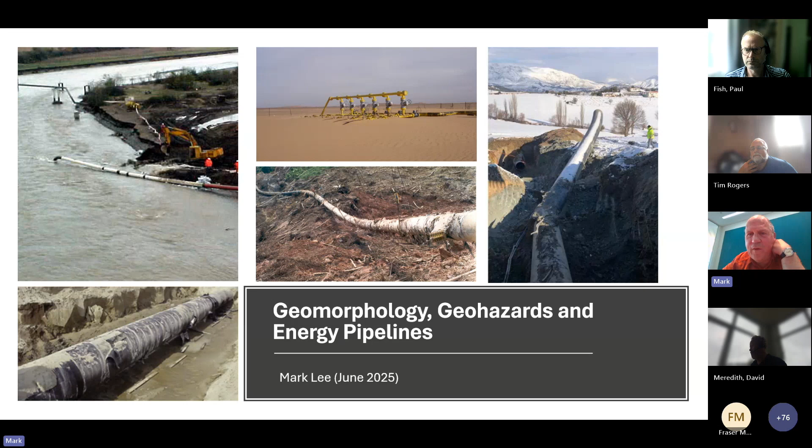Geomorphology, well, I think I'm going to take a pretty Catholic view of what geomorphology is, but essentially it's going to be about surface processes and near-surface ground materials.

So this block of trees, can you see the cursor, Paul? Cursor works, maybe? Yeah, yeah.

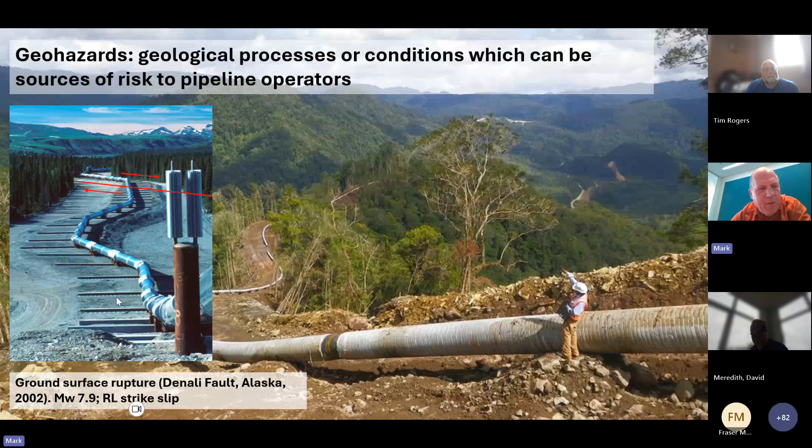So this side is going to be shifting to your right, and this side is going to be shifting to your left. The pipeline is unusual in this context because it's above ground, and it's above ground because of the permafrost conditions. You see the pipeline has been installed on effectively rails, and we'll see why in a second.

This is the impact of the 2002 magnitude 7.9 earthquake. What it led to was these two straight sections of pipe bowing in compression due to shortening across the fault zone. You can also see how the pipeline has been dragged along the railings.

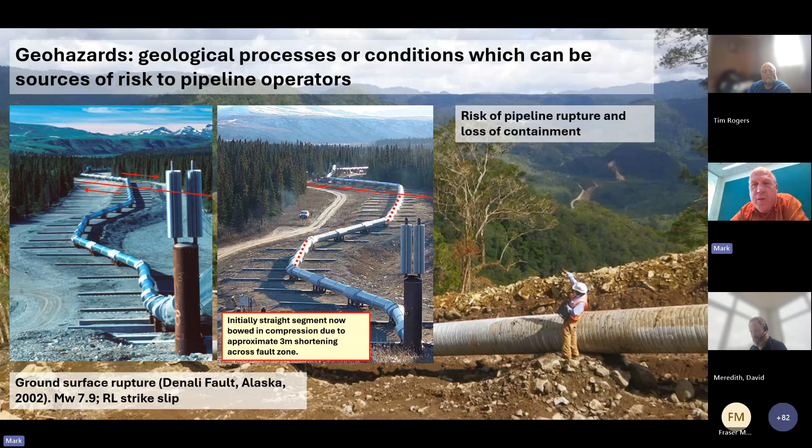So the risk here is obviously pipeline rupture and loss of containment of the product within the pipeline.

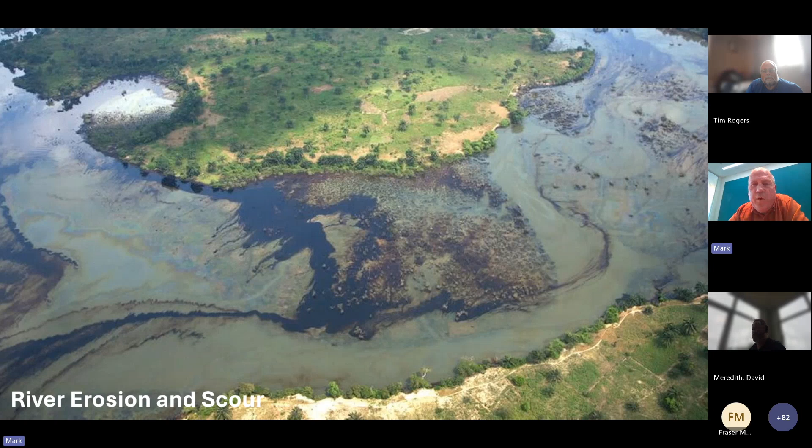So for gently flowing streams, you might have an allowable non-rupture span at 40 to 50 meters, but by the time we've got down to more extreme flow velocities, then spans of 10 meters are critical for pipeline rupture.

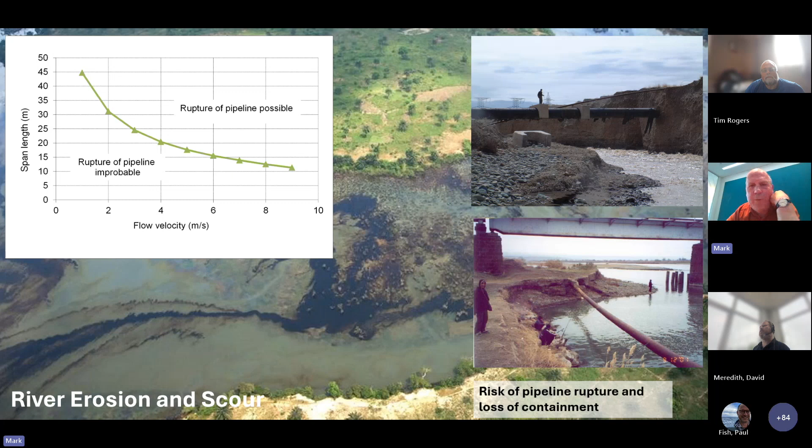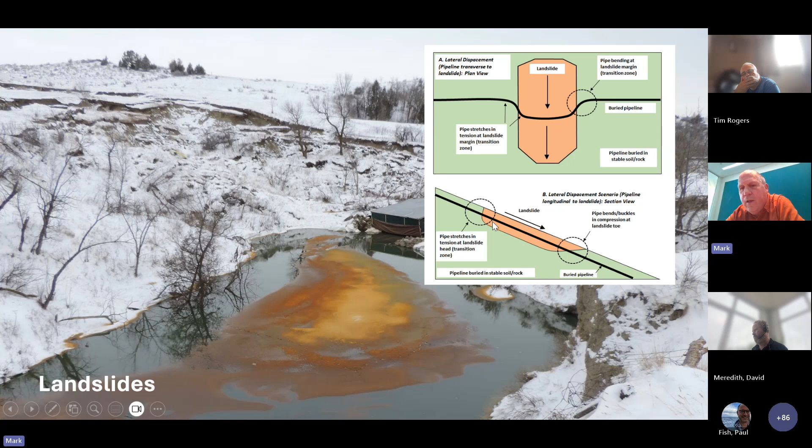So this one is for a pipeline crossing a landslide, and this one would be the pipeline running down through the landslide. And here we get the complicated situation of tension at the head of the landslide and compression at the toe.

One of the key issues is how much displacement can be tolerated, related to the width of the transition zone between moving ground and stable ground. In situations where it's very abrupt, like between bedrock and displaced soil, we can get quite severe conditions. Where the transition zone is wider, it can be more accommodating to the strains.

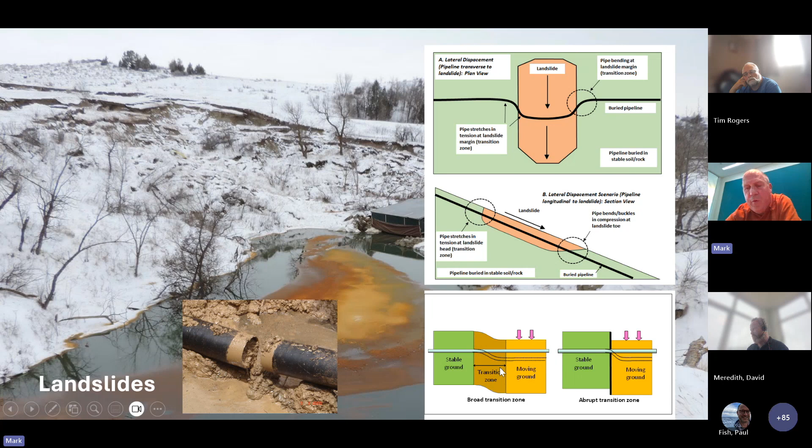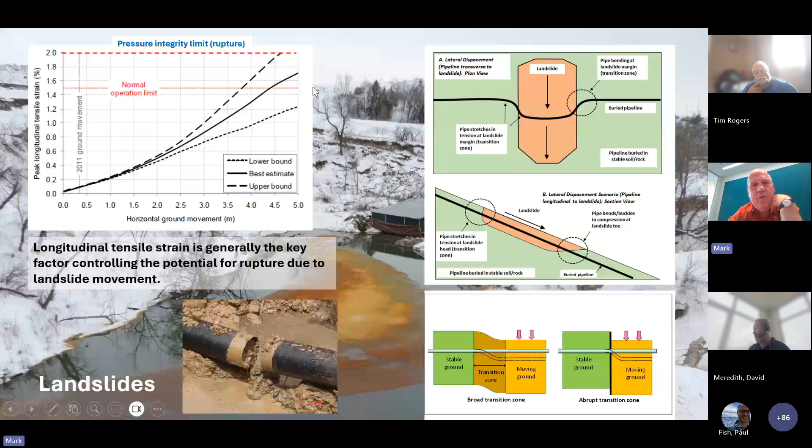The pressure integrity limit is where rupture occurs. The normal operation limit might be where it's safe to operate and you can still run monitoring devices down the pipeline. The pressure integrity limit is where you can expect rupture to occur. And we're looking in terms of, for this large diameter pipeline that has been modeled here, something in the order of 5+ meters of displacement.

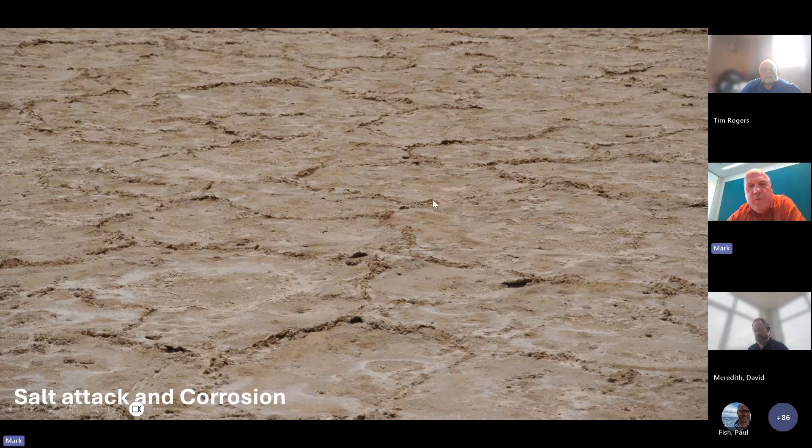Other situations, here we are out in the desert this time. This is an inland sabkha, a salina, and you can see all the wonderful polygonal salt heave patterns across the ground surface.

Pipelines buried within this sort of environment - the groundwater is at or very close to the ground surface, and it's the interactions between the chlorides and ferrous ions within the brine with the dissolved oxygen, which leads to effectively rusting, corrosion and pitting of the pipeline.

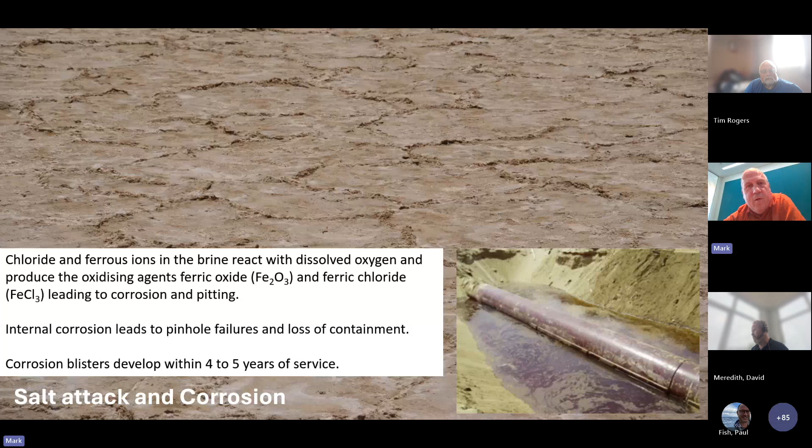Corrosion blisters can develop within 4 to 5 years of service in this sort of environment, and it's a major driver of risk in this type of environment.

One of the things that geomorphology can add to this is the understanding between the position within the landscape, the position relative to the groundwater table, or the limit of the capillary rise above the groundwater table, and the surrounding desert terrain. So the main hazard to buried pipelines would be within saline plains or sabkha salina sort of environments.

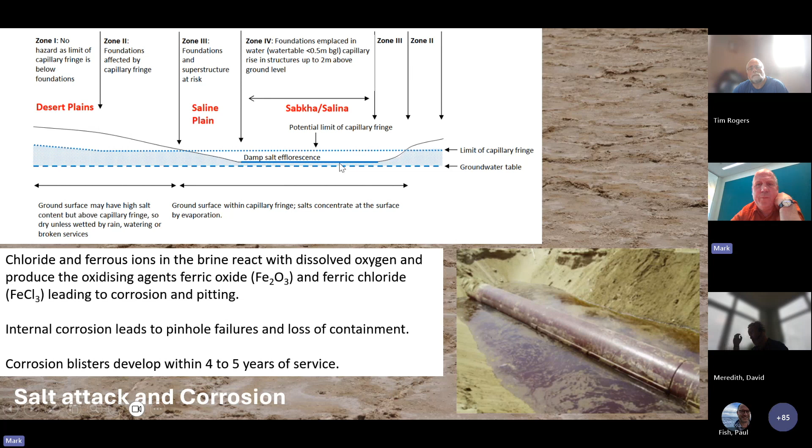Geohazards can also be geological conditions that are sources of risk. Here's an example from Algeria, where the risk is related not to pipeline rupture but to the impact on project cost and schedule. These workers were building a welded water pipeline through the desert, gravity driven, so it needed to maintain a particular elevation. They came across a buried silcrete ferricrete crust, and tens of rock breaking machines were required to make progress, which hadn't been anticipated. They virtually had to scour all the available machines in that part of Algeria to make progress.

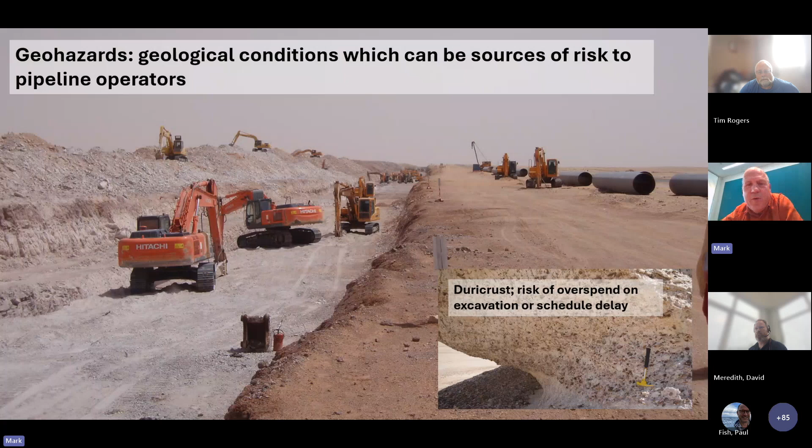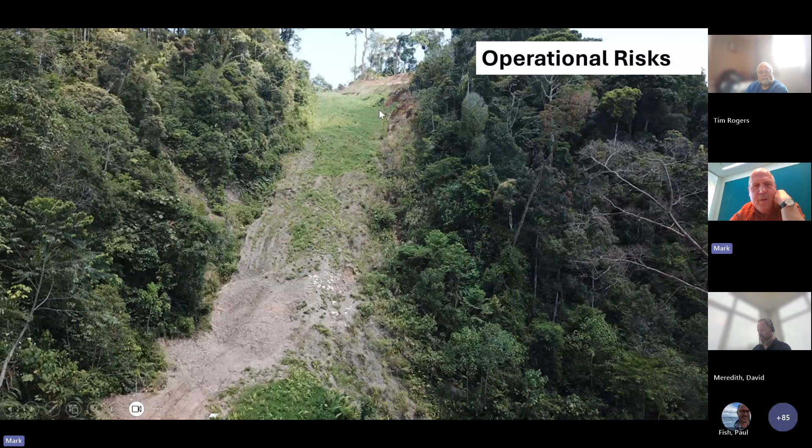Here's a pipeline running through the jungle in Southeast Asia, a typical situation. The pipeline runs down the center of what's called the right-of-way, cleared out of the jungle and revegetating. Then an incident occurs: the gully head fails, the pipeline ruptures, and we have an explosion. You can see the extent of the damage around the landslide area.

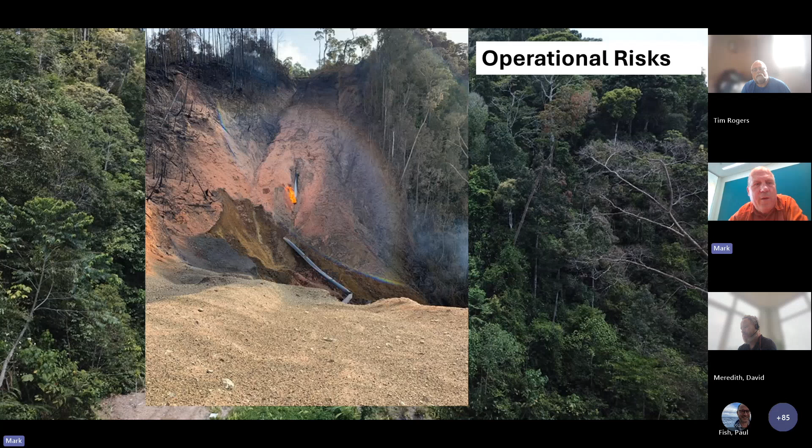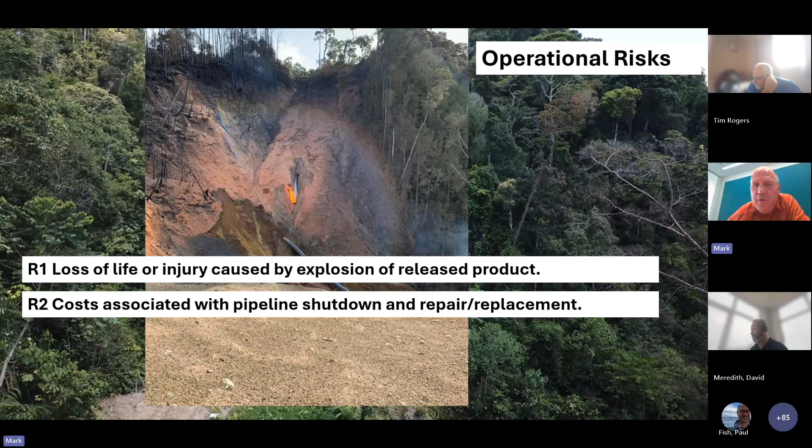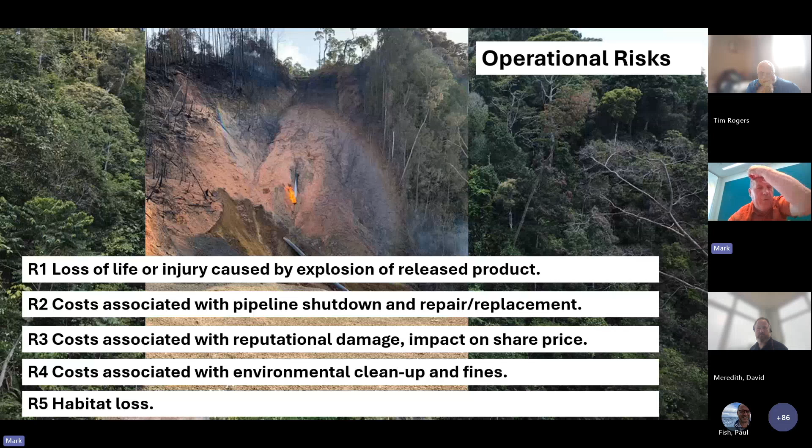The operational risks to the pipeline for the client and operator include loss of life or injury caused by the explosion, though fortunately no one was there at the time. There are costs associated with the pipeline shutdown and repair or replacement, costs from reputational damage and the impact on share price, costs for environmental cleanup and fines imposed by host governments, and of course habitat loss as well.

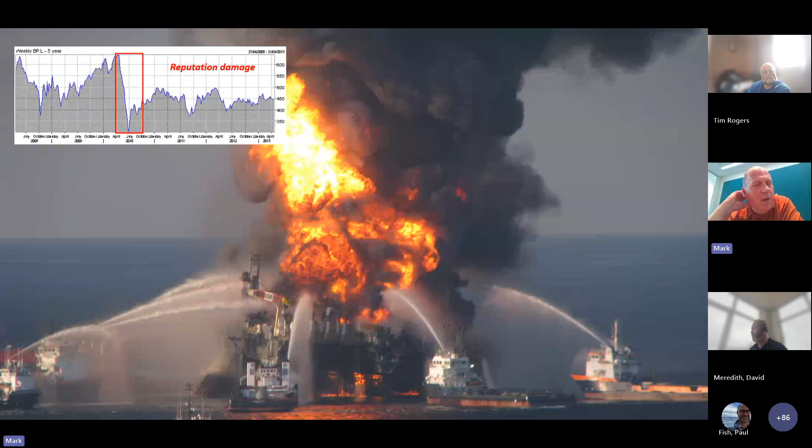So there are bigger risks involved. This is Deepwater Horizon back in 2010, and the chart on the left shows the impact this event had on BP's share price. The share price tumbled dramatically overnight after this, almost to the extent where BP would be taken over by other organizations. So reputational damage is a major driver in understanding and managing risk on pipelines.

So what's the role of geomorphology in all of this? Geomorphology is relevant at all stages of the risk assessment process, and you need to think of its contributions as supporting a global understanding of risk rather than being done in isolation: identifying risks, analyzing risks, providing advice to identify suitable risk treatment measures, monitoring and reviewing, and communicating and consulting as well.

Geomorphology is relevant at all stages of the pipeline process, from planning and design, through construction, all the way to operations. Operations typically span 25 to 50 years, so this requires a long-term commitment to understanding these things.

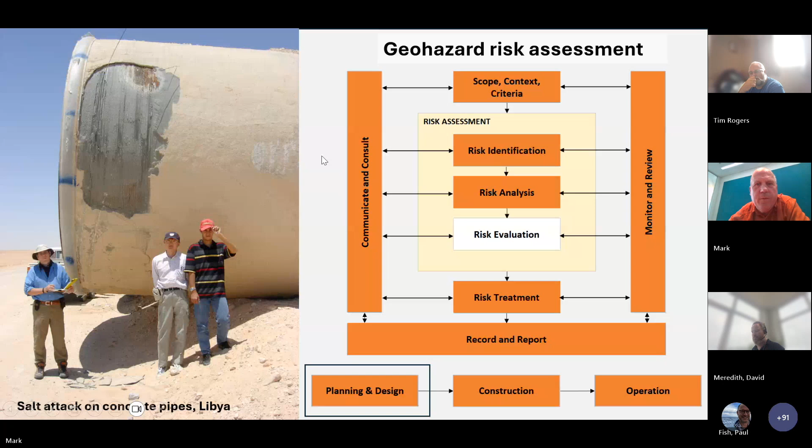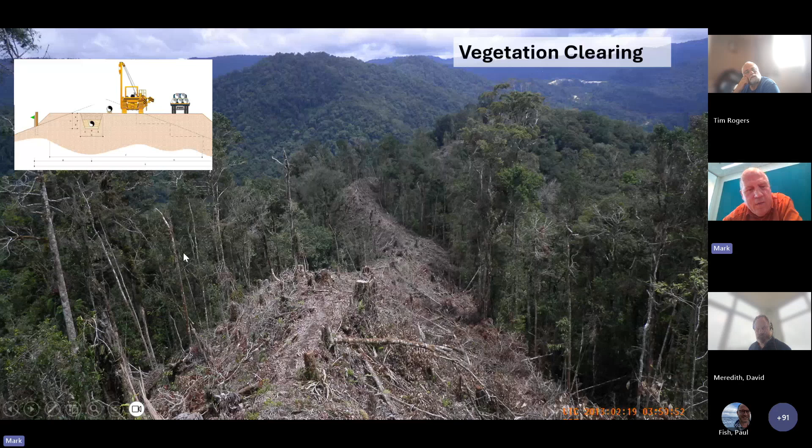First, I'll give a quick introduction to what's actually involved in building a pipeline through remote regions. Here we're back in Papua New Guinea, showing the initial vegetation clearance of the proposed route. We're cutting this ridge crest down to effectively form a 3 to 4 lane working platform where all operations can be carried out. So laying a pipeline isn't just laying it like a hose pipe across the ground surface—there's a lot more to it than that.

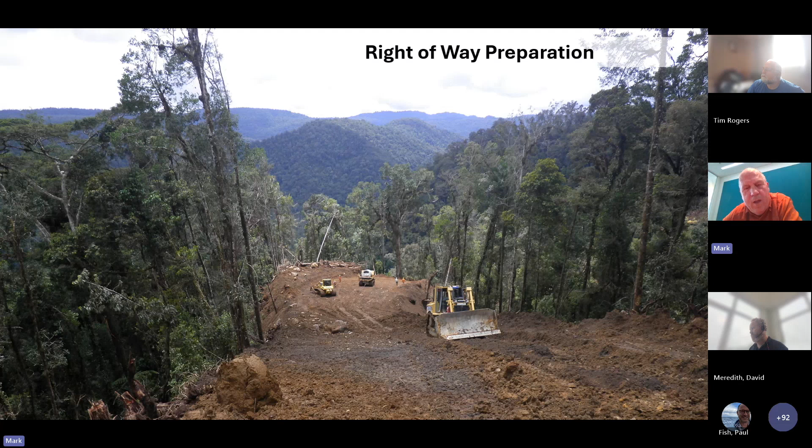Same location, partway through the right-of-way preparation. You can see the bulldozers and the spoil disposal trucks.

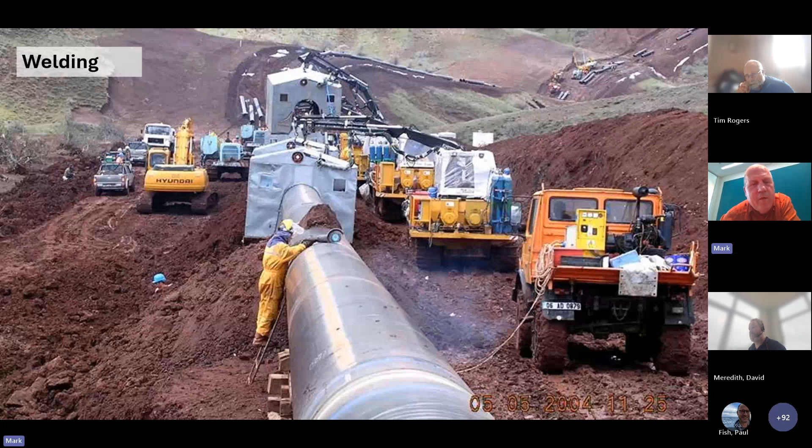Next comes welding, where individual sections of pipe are welded together. In this photo you can see why we need 3 to 4 lanes of right-of-way width: welding gear on one side, other pipeline-related equipment on the other, and a general lane for people traveling up and down the pipeline to do other jobs. If it wasn't so wide, you can imagine the holdups that would occur during the process.

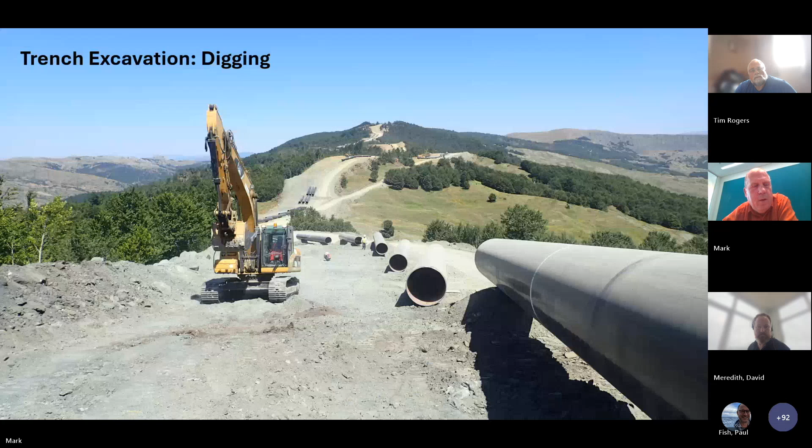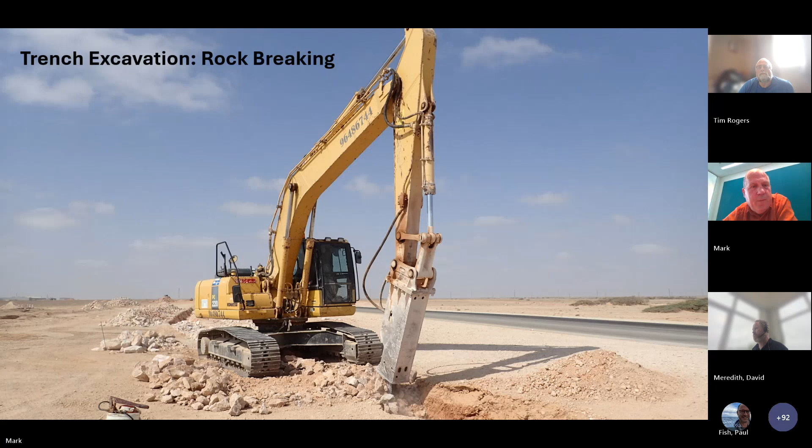Trench excavation—digging the trench into which the pipeline will ultimately be placed—is typically done with a large excavator. In some situations, like desert environments, the calcrete crust may be so strong and massive that rock breaking is required with hydraulic hammers, and in some locations blasting is necessary as well.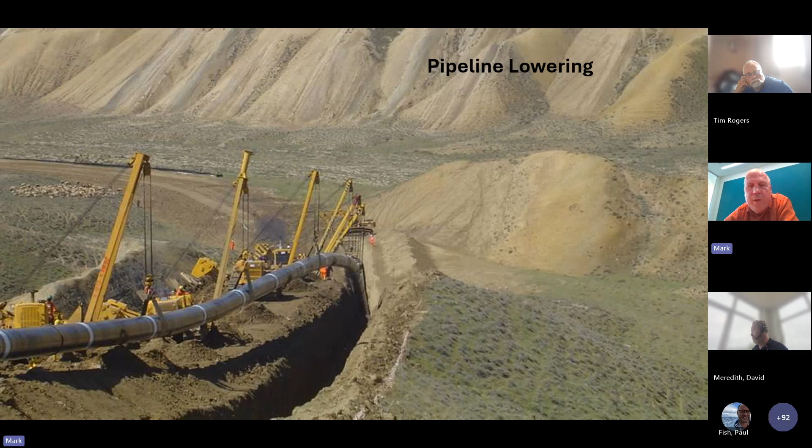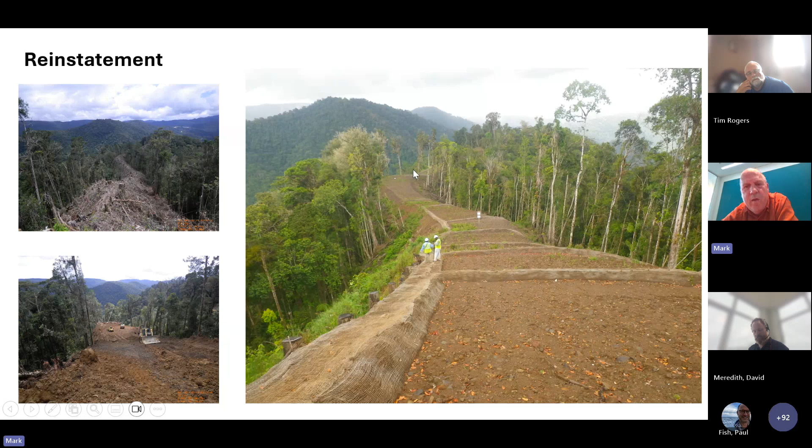The welded pipe is then lowered into the ground, picked up by a series of side booms. Ultimately we end up with the reinstatement of the right of way—essentially the same location, transformed from the cleared right of way back to a situation where vegetation is re-established along this route.

So, the role of geomorphology in pipeline planning and design. First, and possibly the most important, is in routing of the pipeline to begin with. And the general principle of this is the avoidance of risk.

There are some places that we can't avoid, like long linear features such as faults or river systems. The input is related to the design of the crossings of these features with the philosophy of minimizing the risk, since the risk can't be avoided. And then inputs into the design of the reinstatement measures, again to minimize the risk of exposure of the pipeline and resulting pipeline damage.

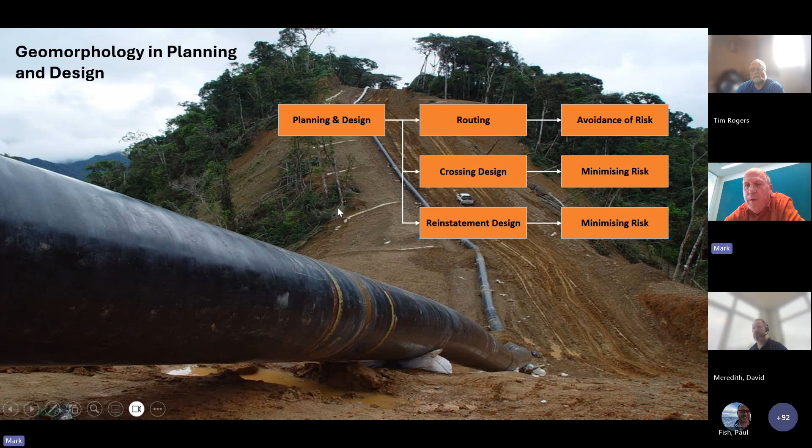Going through landslide avoidance, what this in essence means is that the preferred alignment for most remote region pipelines will be adopting ridge crest alignments rather than following contours, and this involves the avoidance of pre-existing landslides and landslide-prone side slopes.

It's worth pointing out that industry experience is that major civil engineering works to stabilize large landslides are generally not practical in remote mountain areas, in part because of the impact on cost and schedule, but also the availability of suitable machinery to do the investigations.

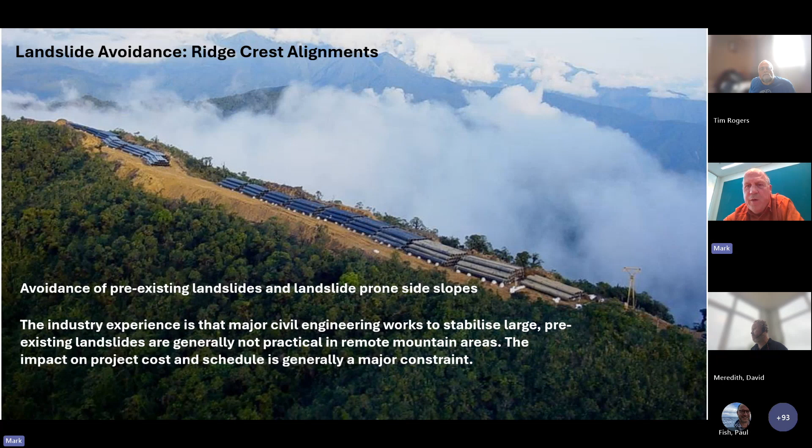The role of the geomorphologist is essentially terrain evaluation and then field verification of that. So in this sort of example, it would be dividing the landscape up into different terrain units, each with its own characteristic package of geohazards, being out in the field, either walking through the jungle or overflights in helicopters to verify those judgments.

Identifying geohazards and undertaking preliminary geohazard risk assessment, including the effects of, for example, coseismic landslides on ridge crest alignments or spur alignments as well.

Routing needs to be supported by landslide avoidance, which needs to be supported by base maps of the landslides in an environment. These can be simple, effectively boundary maps. We don't really need a lot of internal definition of landslides, just where their boundaries are and where they might retrogress to. That would be an input into the project GIS as effectively constraints which need to be avoided.

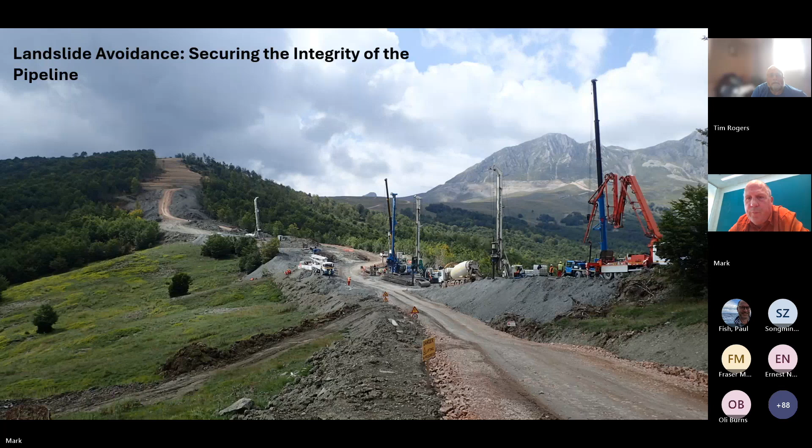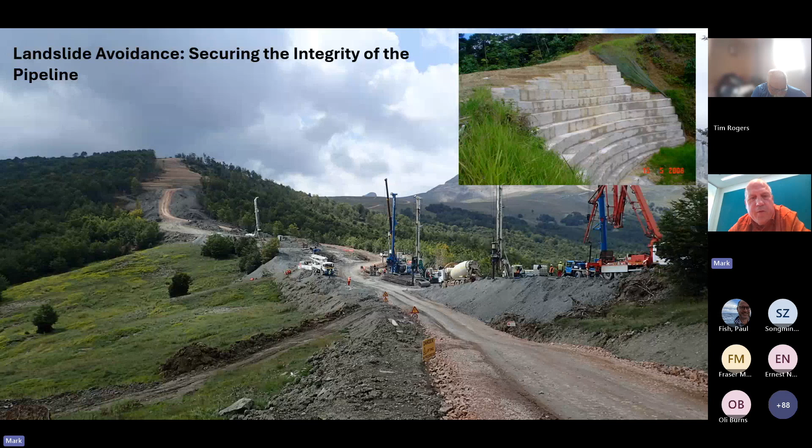In other circumstances, you might be installing gabion walls or concrete block walls, again to isolate the pipe from the slope processes on the adjacent ground.

River crossing design. The top photograph is showing you a typical river crossing, a broad gravel bed river. The first step is actually to build a diversion channel to carry the water away from the crossing point. The pipe is strung together, welded, and then dropped into the trench, which is dug across this ponded area here. When you've done that section, the flow is diverted back down the original channel, and you do the next section of the pipeline as well.

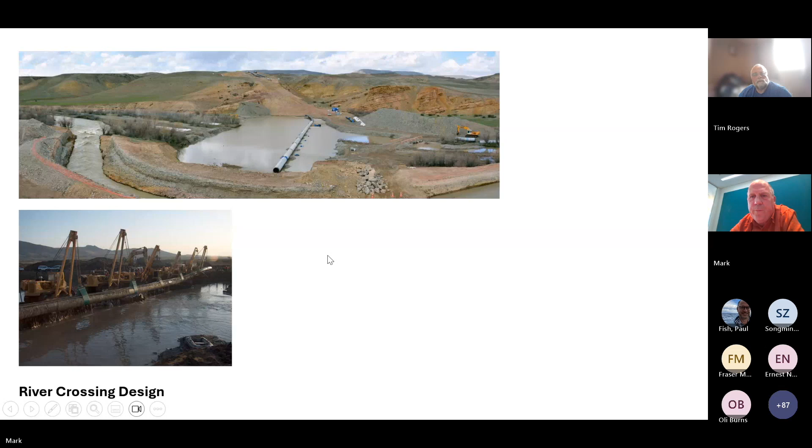What is important here from a geomorphological perspective is actually understanding the active width of the channel, the extent to which bank erosion could encroach upon the pipeline alignment, expose the pipe, and create unsupported spans, and also the assessment of the potential scour depth, which is related to the bed lowering.

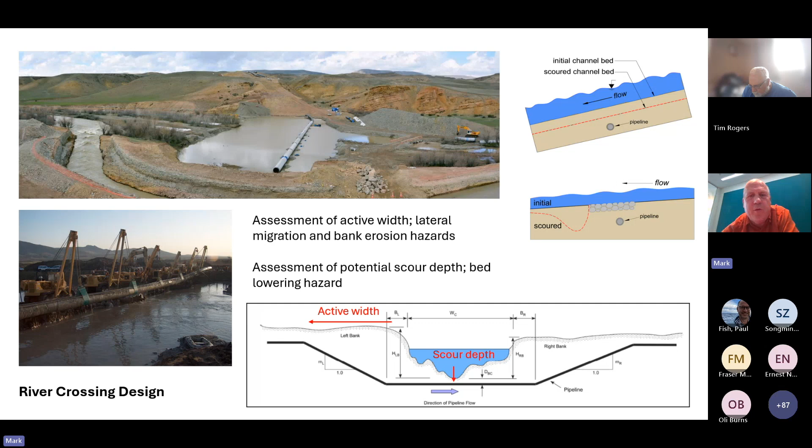And the scour can be either general scour as part of the overall degradation of a channel, or it may be local scour immediately downstream of the pipeline and the protection it's got above it. So these are obviously important geomorphological inputs into crossing design.

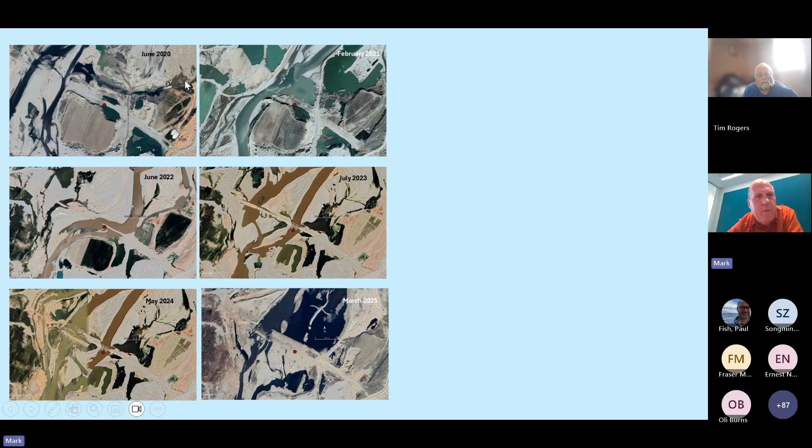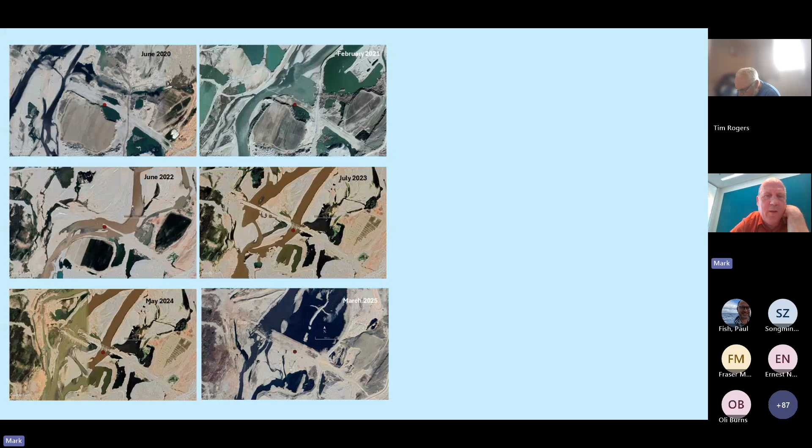Here's an example of the sort of challenges that people might be faced with. This is a river in Turkey, and these are Google Earth images from June 2020 to March 2025, and look at the dynamic nature of the setting where they've chosen to cross the channel.

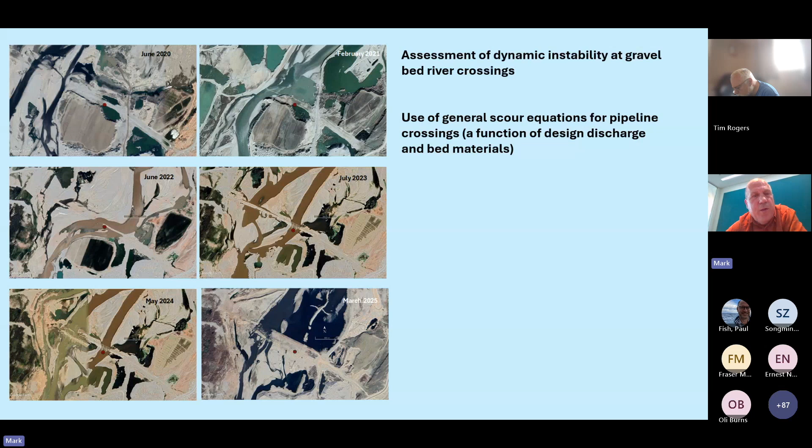Geomorphological inputs are essentially the assessment of the dynamic instability, particularly at gravel bed river crossings, and the use of scour equations for pipeline crossings. The scour equations are basically a function of design, discharge, and the bed materials.

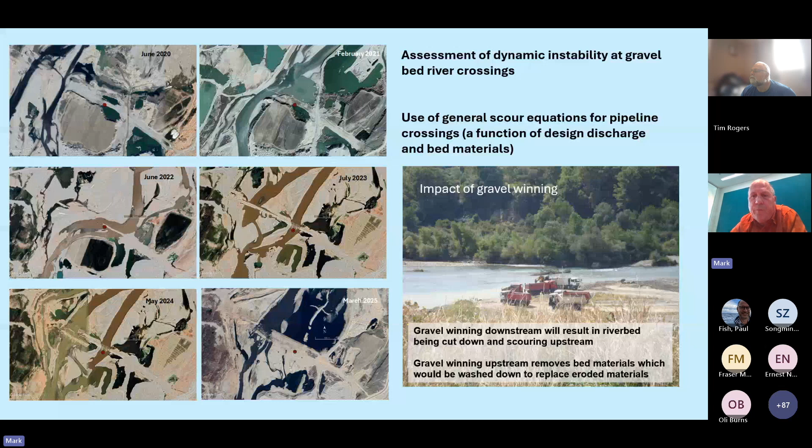So the geological and geomorphological input into this: firstly, we need to know what faults need designed crossings. The general principle for modern pipelines is that faults which have been active during the Holocene have the potential to be active during the design life.

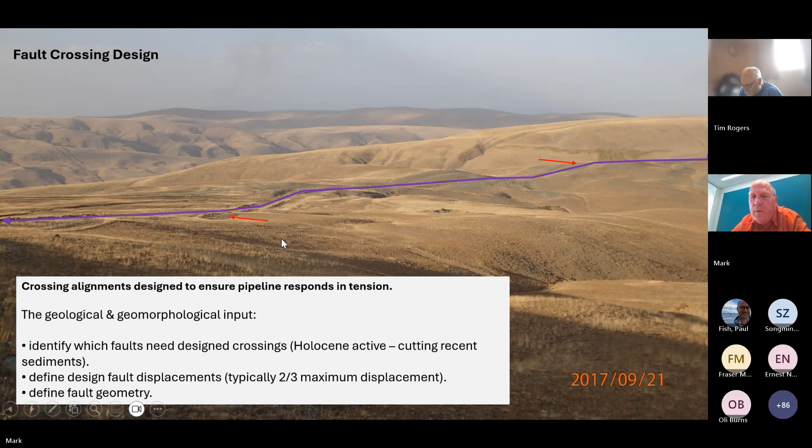The geomorphological input is identifying suitable sediments crossed by the pipeline where we can see whether the Holocene sediments have been displaced, and by how much. We also need to work out the design displacements and define the geometry of the fault. Typically this leads to a group of people, paleoseismic geomorphologists, down in trenches, mapping out all the different displacements within the Holocene sediments.

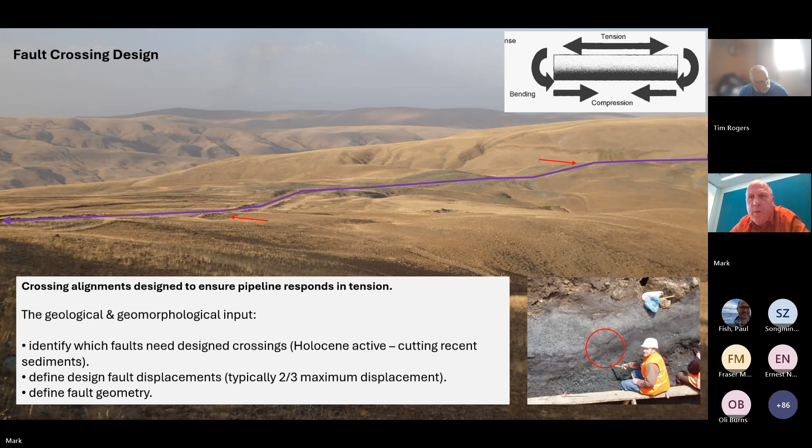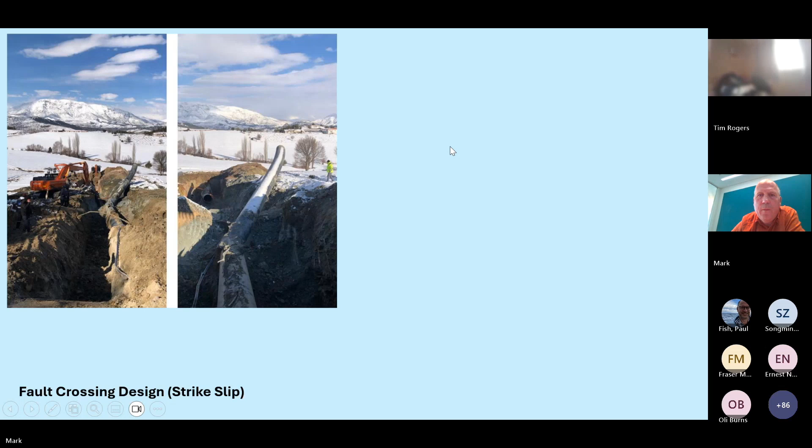The basic aim of fault crossing design for a strike slip fault would be to allow the pipeline to move up and outward of the trench, so it wouldn't develop strains which would lead to rupture or bending and buckling.

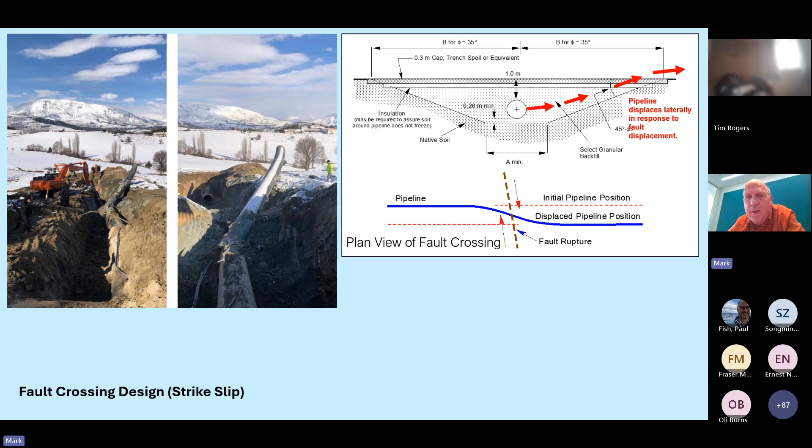The way that this is achieved: there is a trapezoidal trench, filled with generally granular material to allow frictionless movement of the pipeline. The pipeline is wrapped in friction-reducing wrapping, and it lies within a trench lining. So everything is designed to allow the free movement of the pipeline during the earthquake event.

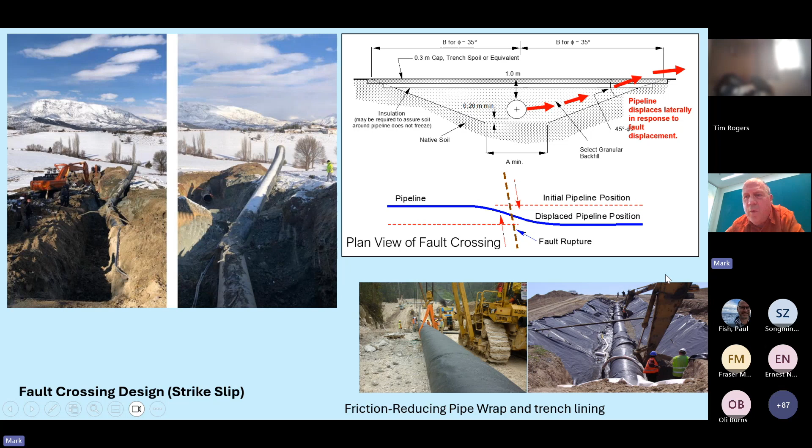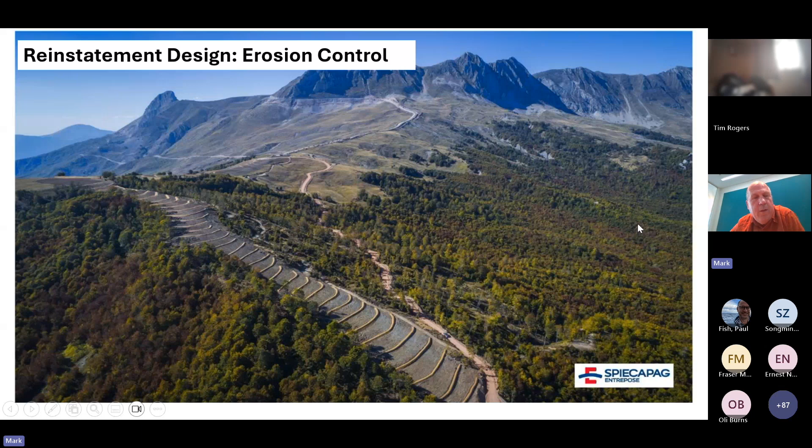Another important aspect of the geomorphologist's role is in erosion control. Most major projects define an acceptable level of soil loss, used as a performance criteria to judge the quality of the work done by the contractors. Pipeline exposure or local damage to the right-of-way is generally considered unacceptable, and there are also important environmental issues associated with erosion along the pipeline.

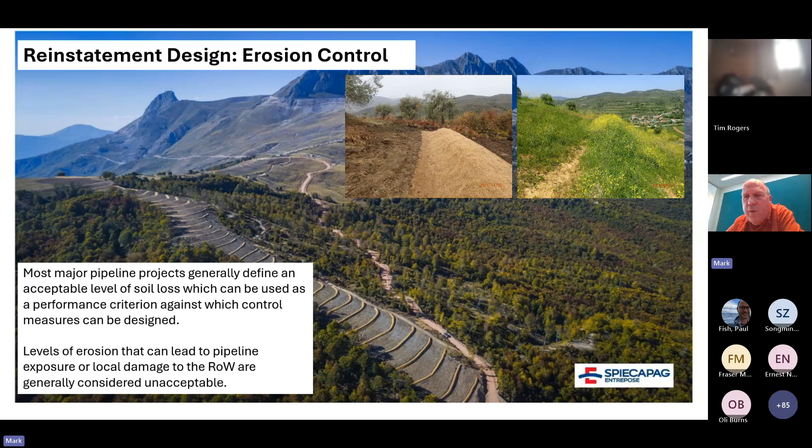In this example, you can see a whole series of diversion berms, effectively like mini dams, collecting water across the slope and minimizing erosion risk. These channels divert water towards a collector channel on the side. The overall aim is to ensure that the reinstated topsoil isn't stripped off, and that revegetation occurs within the next 2 or 3 years after construction. Here's another example as well.

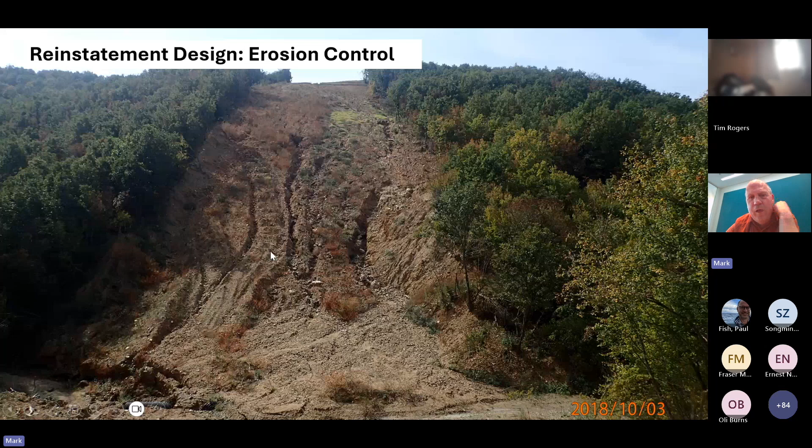So how do we go about looking at the erosion control issue? Well, this is certainly a situation that we don't want to arise, and you can see the deep gullies which have developed on this steep ravine side slope.

Basically what we're doing is using the universal soil loss equation developed for agriculture to make an estimate of the potential soil loss along the right-of-way in tons per hectare, both in the bare right-of-way situation and then trying to reduce that loss by the introduction of erosion control measures.

These erosion control measures can include factors which reduce the slope length, effectively breaking up the length of the slope into a series of independent separate subunits. You're introducing crop management factors such as jute matting coverage, and erosion control practice might be effectively contour ploughing across the right of way, rather than creating the potential for rilling by scouring in an upslope-downslope direction.

What we would normally do is look at how the right of way is expected to perform in response to a design storm, typically a 1-hour storm with a 10-year return period. The focus of interest is generally within the first few years before vegetation becomes re-established.

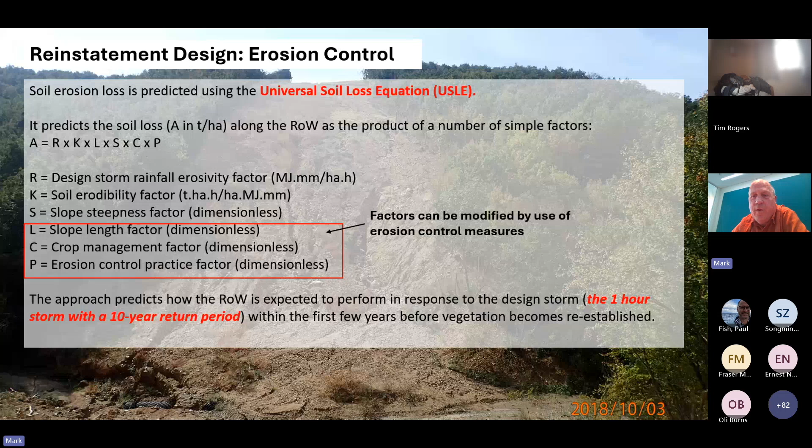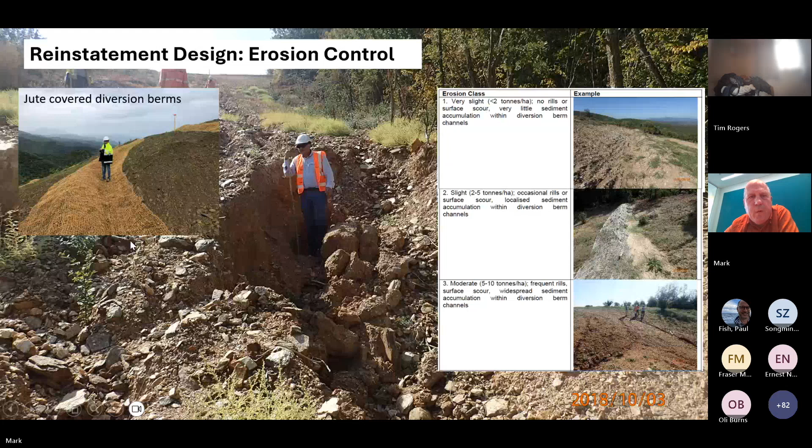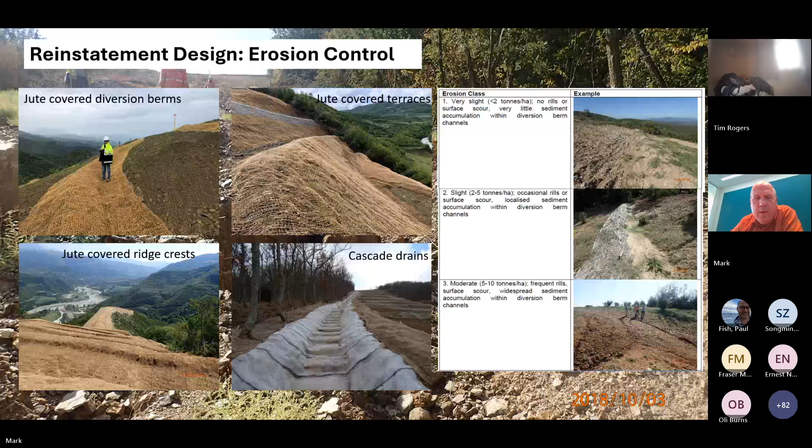So what we've got in the toolkit: jute-covered diversion berms. The important thing is that the diversion berms reduce the slope length, since erosion potential is in part related to the length of the slope. So slope length is reduced, water is collected within the channel, and it's taken to the side of the slope. We have on steeper slopes jute-covered terraces, jute-covered ridge crests, and at the edge of the right-of-way, cascade drain systems.

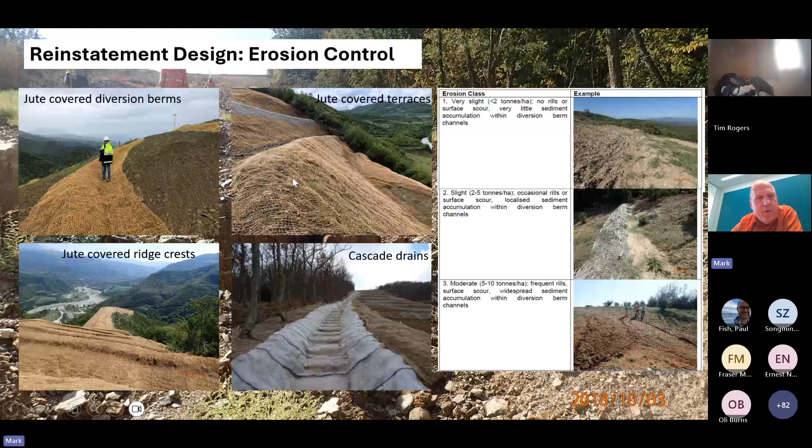So very much the responsibility of geomorphologists in helping the design of this.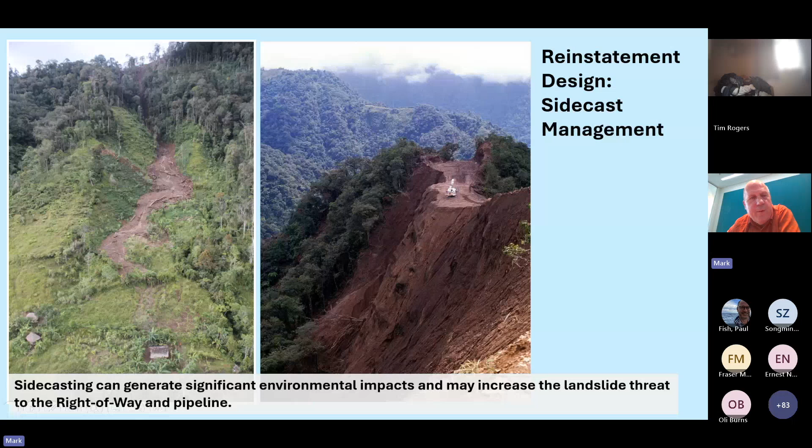I'll say a few words before we wrap up on construction and operations. During construction, problems occur. It's inevitable, but they need to be identified, assessed, and treatment measures installed.

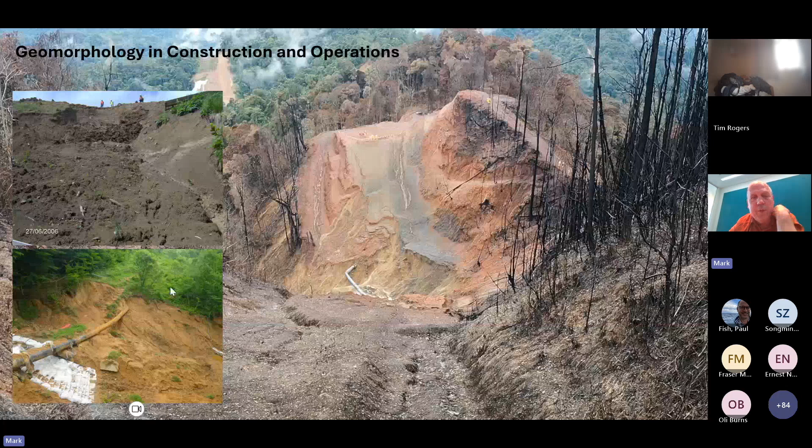Problems arise during operations. Here, a debris flow has occurred, exposing the length of pipelines. Treatment measures need to be designed and installed.

Sometimes there's a necessity to dig up lengths of old pipeline which cross landslides and relieve the stress within the pipe, which is what's going on here. So the stress relief will reduce the buildup of stress, and often the pipeline will deflect back by up to a couple of meters.

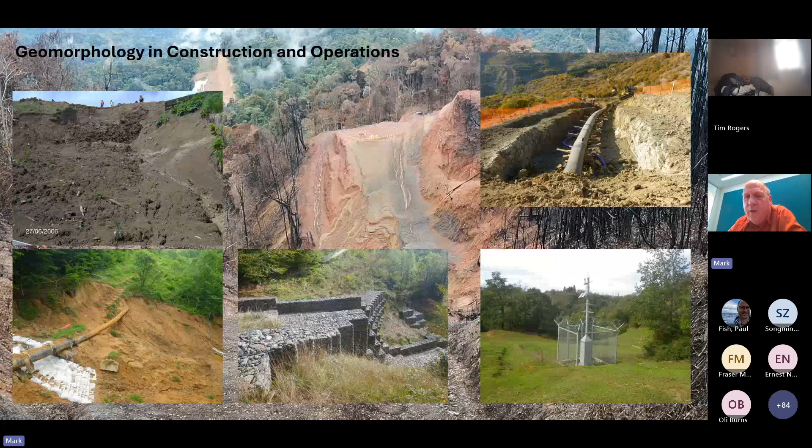And of course, there's monitoring of problems, long-term monitoring. This is the telemetry system for automatic inclinometers that have been installed in one location.

Right, wrap up time. Challenges involved in the work: it's teamwork. So it's not uncommon for the client, the contractor, and the consultant all working together.

So the geomorphologist is not working in isolation. He's not somebody who's writing a report, turning his back on the project and moving on. You're working with pipeline engineers, surveyors, engineering geologists, environmental scientists, and so on.

So the key skill here is in terms of communication - communication and not hiding behind your own disciplines, jargon, and related impenetrable languages. Communication's probably the most important skill.

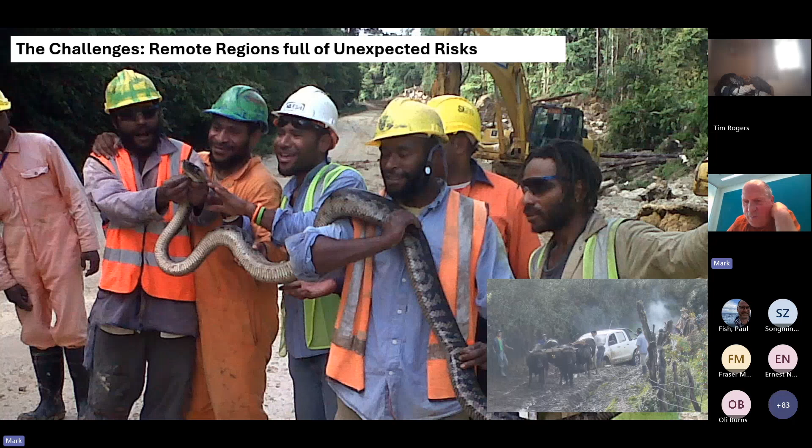Remote regions can be full of unexpected risks. Here, we're stuck on the mountaintop in Peru, having to be pulled out by some local cattle.

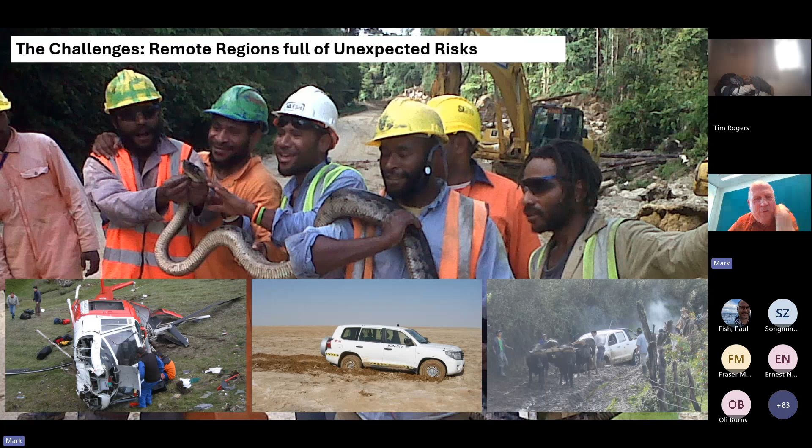Stuck in the mud in the middle of a salina in the Oman Desert. And of course, sometimes even more serious things can go wrong.

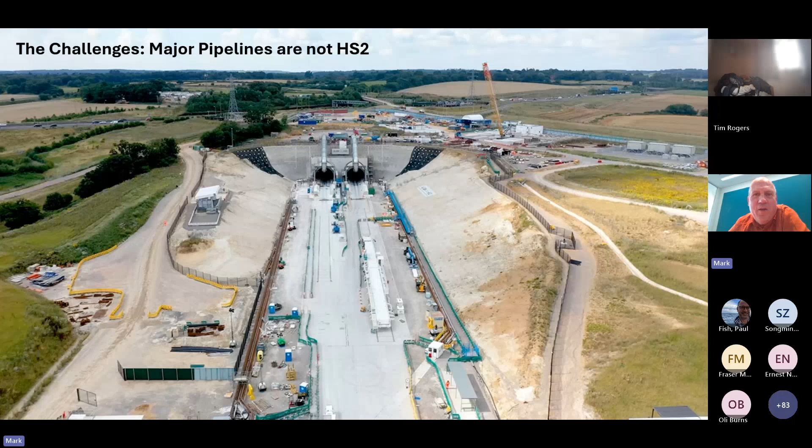And finally, it's worth stressing that major pipelines are not HS2. Project schedules are really tight, and this places significant constraints on the available time to identify and manage geohazard problem areas.

This also explains why the approach to managing risk is typically risk avoidance, because although it may be potentially more expensive, it's actually easier to achieve within the timescales available. Landslides are identified and avoided rather than investigated and treated.

As an example of the timescales, the pipeline in Peru that you've seen photos of - the government set a pipeline start date of 1st of August 2004, just 4 years after the award of the contract, and established a system of fines for failure to meet the deadlines, set at $90 million if the delay was at least 90 days.

So not HS2, everything is moving really quickly, and you have to be able to work in that sort of tight environment. And that's the last one.

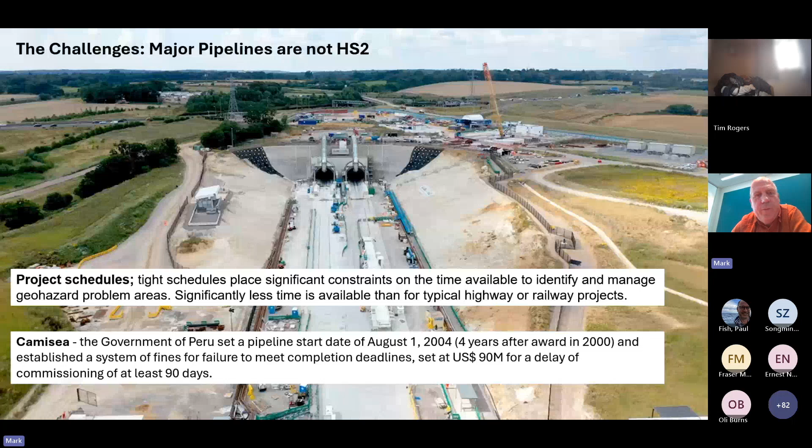That's it, Paul. Super, thank you very much, Mark. Excellent pictures, really interesting to hear your experiences. Does anybody have any questions?